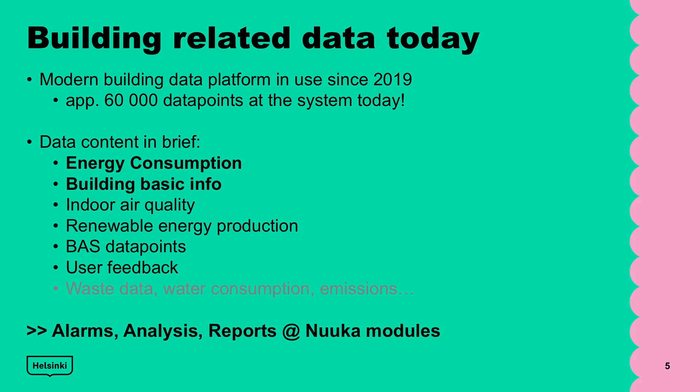But anyway, this study led to the decision to open the building basic data as well as the energy consumption data. And today we have this open data covering the main meter energy consumption data of approximately 600 service properties, meaning over 1,000 buildings. There are hourly based energy consumption data and the building basic data as well.

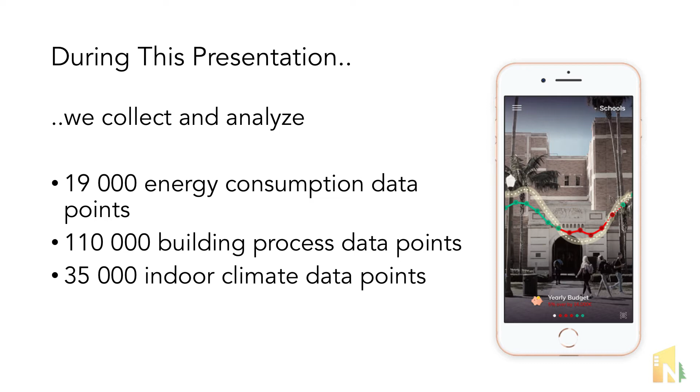We offer a data platform solution for our end customers. We collect, analyze, and refine data from different data sources in the building, and offer different use cases for different individuals within the real estate organization, ranging from the owners of the property to the actual building maintenance people doing the practical work.

Today we have connected approximately 3,000 buildings to our software, and we have made about 100 ready-made integrations to different building automation systems, energy management systems, indoor sensoring systems, and so on. To mention names, ICA Real Estate, Unilever, the Edge Technologies, and the City of Helsinki trust our technology.

In the end, we make sense out of the data that we collect. We try to make it simple, relevant, actionable, especially for the business owner. The idea is that you can check, for example, the top 3 key performance indicators when you're going to lunch and get the real-time picture of what is actually happening in your building portfolio.

A few words about what we do with City of Helsinki. Today, over 1,000 buildings in the City of Helsinki area are connected to our system. As part of the Carbon Neutrality Helsinki 2035 program, we help them make their city buildings more energy efficient and indoor climate friendly. Energy and indoor experts from the City of Helsinki use our software for building energy reporting, indoor quality monitoring, and making sure the buildings work as they should.

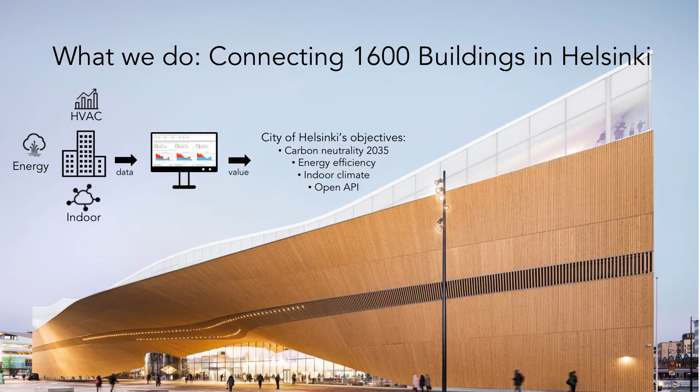One concrete use case of our data is our new AI Air concept, which is the first of a series of AI applications we are making. The basis for this new solution is that we believe artificial intelligence is the new user of buildings' HVAC processes. AI Air is an optimization application based on artificial intelligence and machine learning technology, which makes the operation of the HVAC process more efficient.

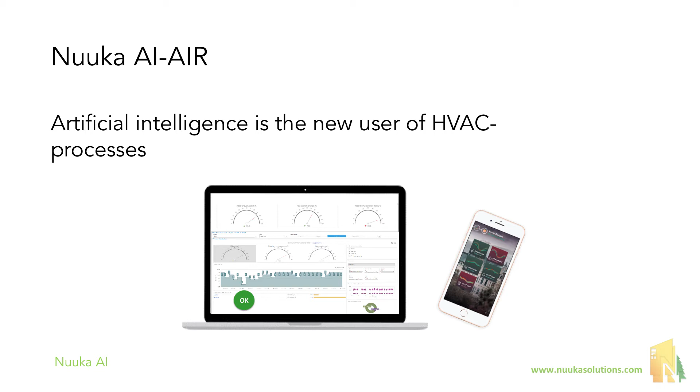AI Air calculates the optimal air volume based on the HVAC process data that we collect, and sends new set points to the building automation every 1 to 10 minutes. On top of this, clear key performance indicators in our dashboard make it easy for our customers to see the energy efficiency savings in real time, see the indoor air conditions, and show the economical impact of the optimized processes.

By optimizing the building — by predicting the CO2 values in the buildings using AI Air — our customers could make substantial savings in heating and electrical consumption. Obviously, all this takes into account good indoor air climate in the buildings, so that, for example, the ppm levels do not rise too high.

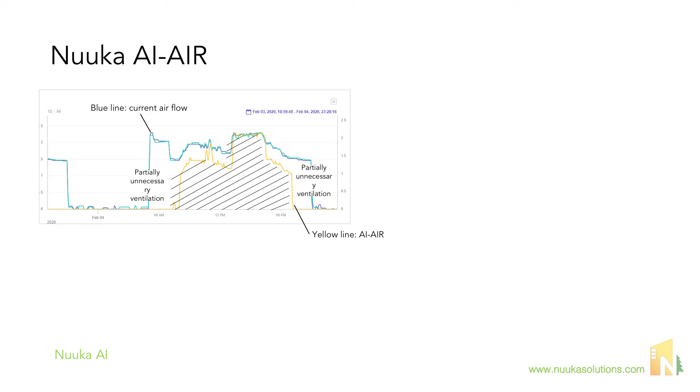Based on our current implementations, we estimate this can save up to 30% on electricity and up to 10% on heating in ventilation processes in buildings. This would mean up to 100,000 crowns in savings a year in energy for a mid-sized school or office building.

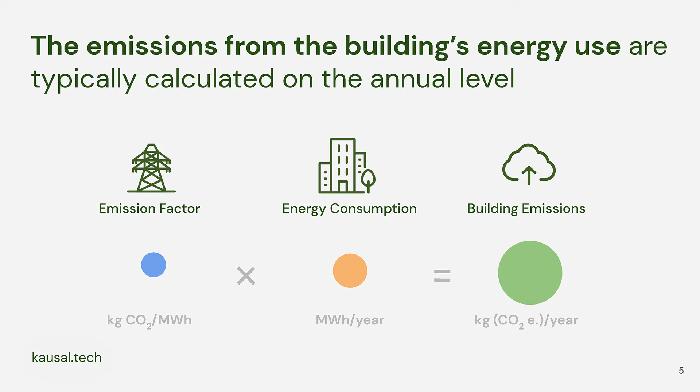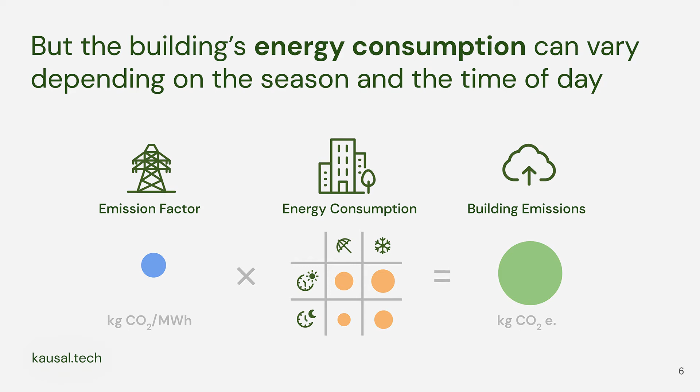But we also know that a building's energy consumption can and does vary quite a lot depending on the season and the time of day. Usually in Finland, as probably in Sweden, most of the heating energy is consumed during the winter, and most of the electricity in the daytime. And that's fine—that still wouldn't mess up the calculations.

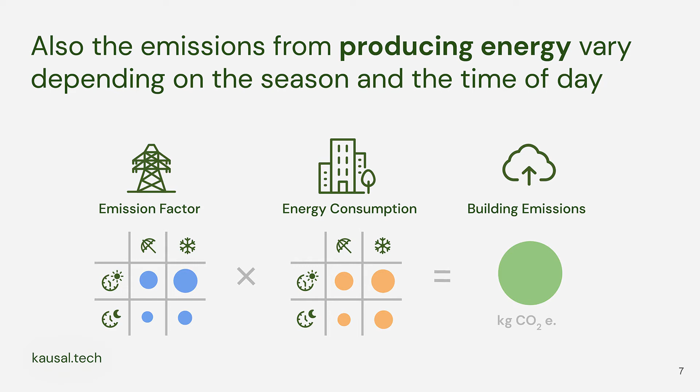But the problem is that the energy production emissions also change heavily depending on the season and time of day. In Finland, in the winter time, we have to burn more fossil fuels to produce heat, so the emission factor is higher in winter. If we have a building that uses most of its energy in summertime and less in winter, calculating on annual numbers would overestimate the emissions, when actually they are quite a lot smaller.

And this would work the other way around too. If we have a building that really uses a lot of energy in the winter time, then its actual emissions would be quite a lot higher than the annual calculation suggests.

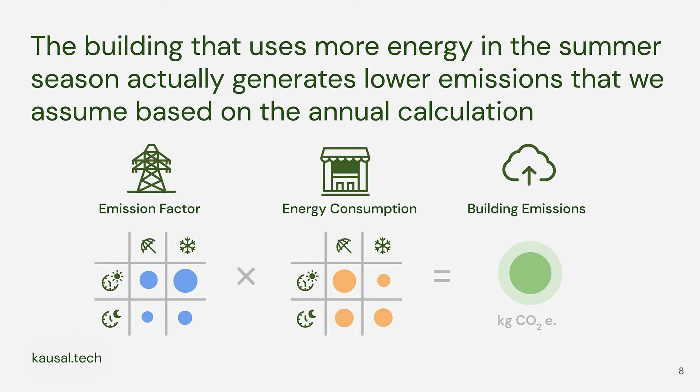So what we did is build a tool that runs this hourly analysis. We generated an hourly emission factor, then used the hourly energy consumption data and ran it over all of the 1,000 buildings. This gave us a much more accurate picture of the true sources of emissions, so when we want to focus our mitigation resources, we can do it more efficiently. Here is one result graph from the tool we built.

It shows the emissions over time, over 3 years, for one building, the School for Visual Arts. This isn't too surprising—most of the emissions come from heating consumption, and it's the winter time that is the problem. So when we want to bring down emissions for this building, this is where we should focus.

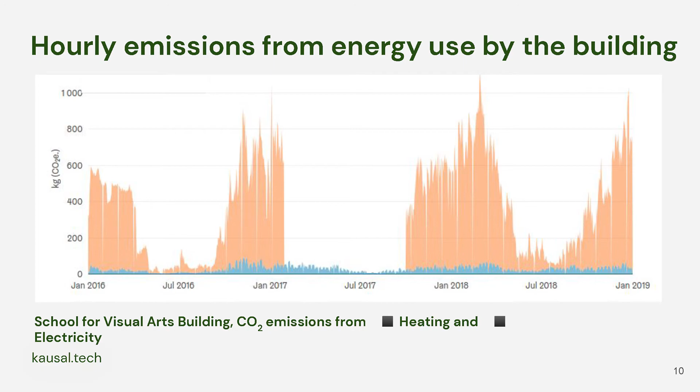All right, so that was one of the tools. The other challenge we wanted to tackle was related to solar panel installations, because we knew from the Carbon Neutral Helsinki program that the city needs to build hundreds and hundreds of gigawatt hours of rooftop solar power. But the question is, where to start from? What would be the best, most cost-effective buildings to put solar panels on first, and what would be the optimal size of the solar power plant?

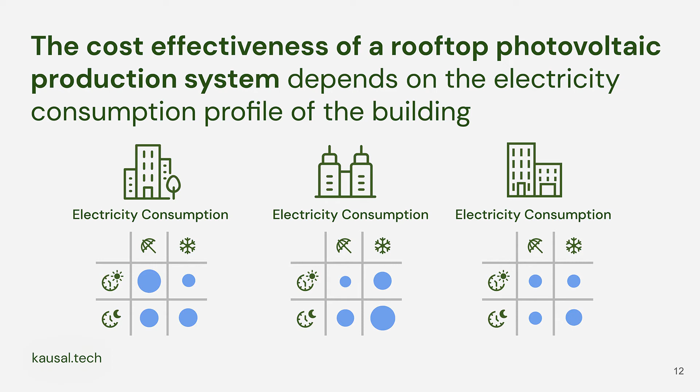We know that the cost effectiveness of a solar plant on a rooftop depends on the electricity consumption profile of the building—there are many different kinds of profiles. If a building uses most of its electricity when the sun shines, in summer and daylight, then we get to use most of the solar panel production to reduce the electricity we need to buy from the national grid. So this would be a very good fit, most likely.

But what about these other types of profiles? How would it work for them? And again, what would be the optimal system size for each of these buildings?

So we built a simulation model. We wanted to get a super accurate estimate of the solar panel sizing. What the simulation does is go through all of the hours in a year.

Here we have one winter hour, and a fairly small solar panel installation. The simulation basically calculates the energy balance for all of the hours. Here is one hour from the summertime, and we see that the solar panel is producing somewhat more, but we still end up buying electricity from the grid, and that is expensive. We repeat the simulation for all of the hours during the three years.

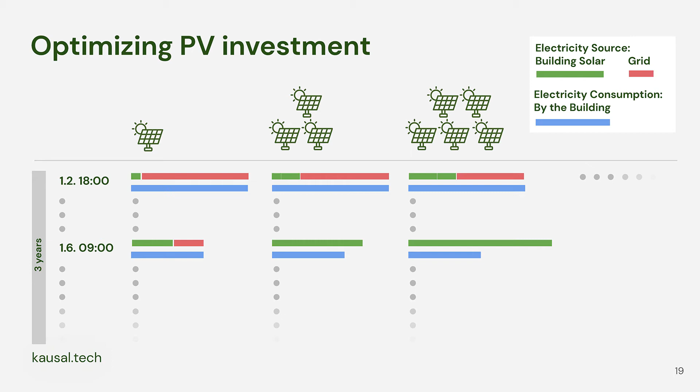We do the same thing with a slightly larger solar panel installation. Here we see that in the summertime we are already covering all of the building's own consumption and producing a little bit more, and the rest we sell to the national grid. But selling to the national grid is not very cost effective, we get very little money from that. We try with an even larger installation, and here we see that we're producing quite a lot more than we need, so this installation probably would not be very cost effective anymore.

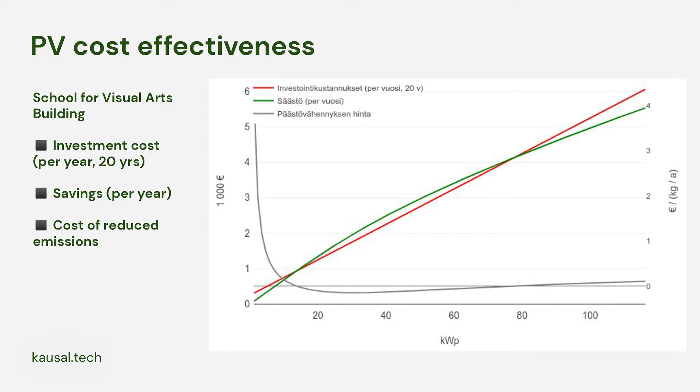When we put all of this together, this is one graph from our interactive tool. The green line shows the cost savings on a given panel size, and the red line shows the investment cost over 20 years. If the green line is above the red line, it means it is cost effective, we're saving money by installing this solar plant. Here we see like 20 to about 80 kilowatt peaks - that would be a good investment, we would be saving money.

If we look at the numbers, this is, I think, still the School for Visual Arts. If we build a 60 kilowatt solar power plant there, we end up saving about 800 euros per year, which is not a lot. But more importantly, we are reducing 2,600 kilos of greenhouse gases every year from the atmosphere. Removing each kilo from the atmosphere actually costs negative euros, so we're removing greenhouse gas emissions and earning money while doing so. It's kind of like a climate mitigation dream come true.